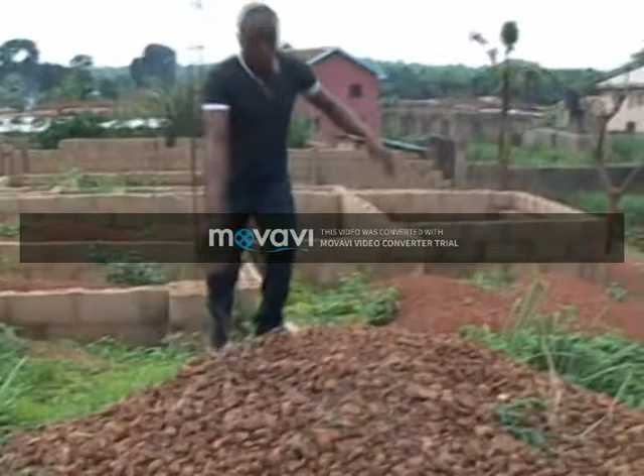To lay good foundation, earlier the better. In the nearest future, you will be one of the leaders. So we pray, amen. Oh my daughter, you should be ready to lay good foundation. Earlier the better. In the nearest future, you will be one of the leaders. So we pray, amen.

To become a leader is not very easy. To become a man is not daily work. Everybody's ambition is to become a leader, is to become a big man. That is the struggle. Oh my daughter, you should be ready to lay good foundation. Earlier the better. In the nearest future, you will be one of the leaders. So we pray, amen.

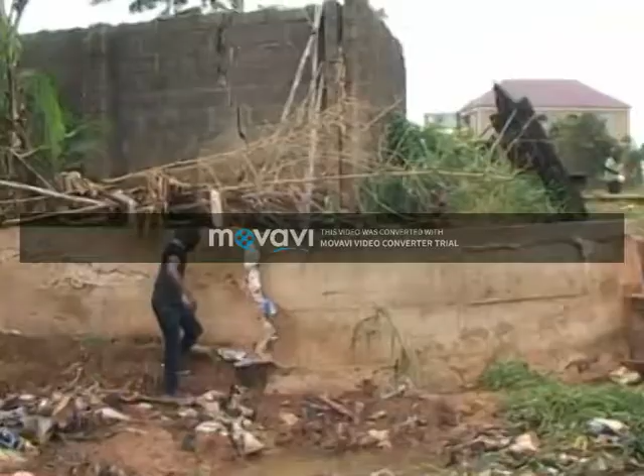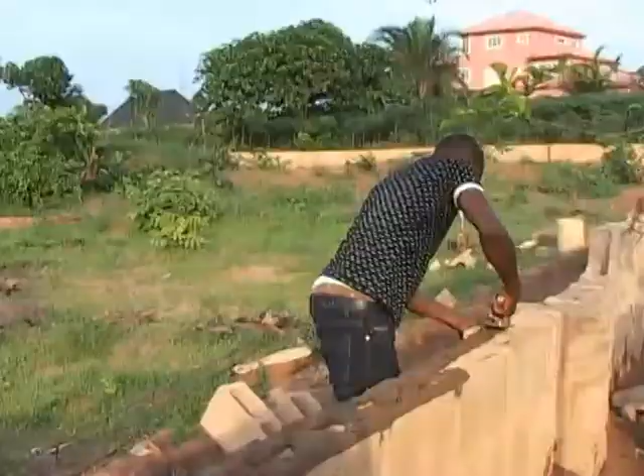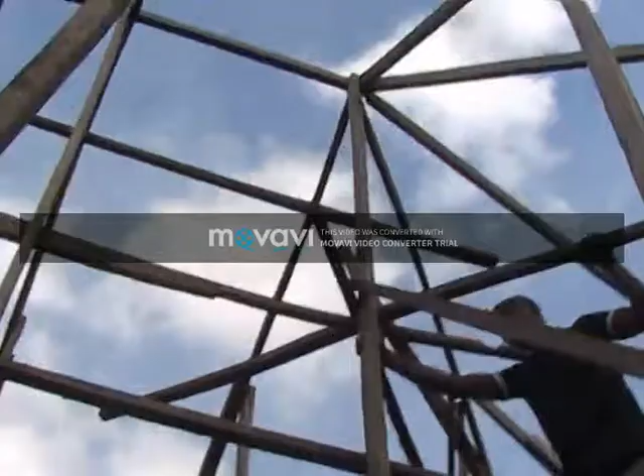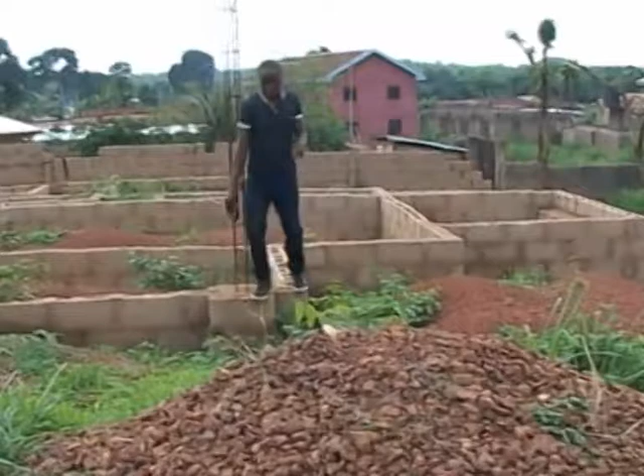You should be ready to lay good foundation. Earlier the better. In the nearest future, you will be one of the leaders. So we pray, amen. To become a leader is not very easy. To become a man is not daily work. Everybody's ambition is to become a leader, is to become a big man. That is the struggle. So my daughter.

Today's lecture on building skill acquisition has the intention to transfer the knowledge and the skill of building a house to the present students and future generation of Nigeria. This building skill acquisition will enable the students and the young generation of Nigeria to have the skill that will equip them to meet up with the economic challenges in the country.

Because when one has acquired the knowledge of building skill acquisition, that person can be able to employ himself or herself, and fit into one industrial aspect of the nation, because it is obvious that most people do not have the opportunity to pass through the higher institution, and some of them use having no opportunity to pass through higher education in the country as an excuse for their unemployment.

But after today's lecture, they will know about building skill acquisition, and anyone who watched this lecture will know how to construct a house. So today, I will tell you people how to start the processes in building construction. I will first and foremost introduce myself. I am Oluka Ifeanyi, a graduate of Enugu State University of Science and Technology,

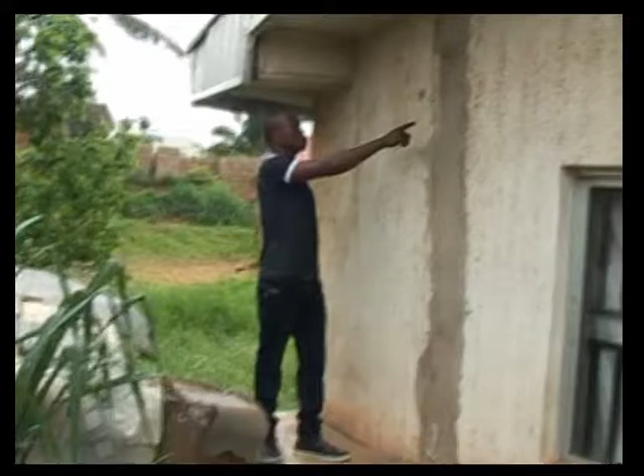Now, for those who are not qualified in building construction, those who do not pass through the necessary practice in building construction, I will show you an example of what they have done, which resulted in negative consequences. Now, look at this building to observe what I'm talking about. I told you that I will show you the consequences of improper foundation type in building construction. Look at this wall. You can see a crack. This crack in this building is a result of inadequate foundation use.

The builder that constructed this building did not know that he's supposed to make use of a raft foundation in this type of sticky clay soil, which is associated with the swampy area in this place. And as a result of this, the occupants of this building have run away for their dear life. And there are so many other inconveniences that may come if the engineer does not know what he's doing. So take a note. So listen again.

This type of soil is not very proper for building construction because of the earth movement, the land movement. The land is expected to vibrate at least once every year. And when a builder has constructed a house in this type of area, after the rainy season, if the builder did not make use of the normal foundation type that will suit this soil, during the movement of the soil, the building will start cracking, just as the example I have shown you in this building.

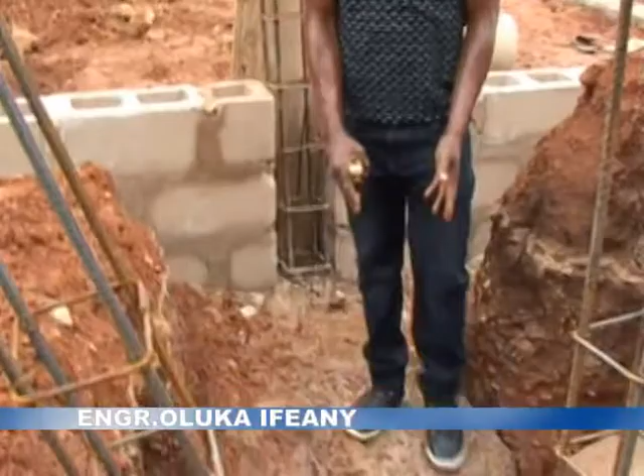But we have to start with raft foundation. Raft foundation. If you listen properly, you will know about the raft foundation. In this lecture, we discuss raft foundation. And here, looking at the foundation trench, you see this place has been blinded. After this blinding, next comes the raft foundation, because the raft foundation is a type of foundation that consists of a reinforced concrete raft under the whole building on compressible ground, such as a very sticky clay soil. Now look at the application of the raft foundation.

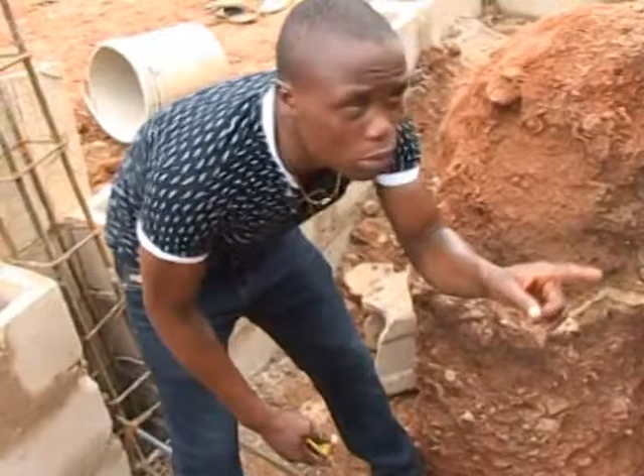After the blinding of the foundation trench, next comes the bar. This is a bar. After placing this bar, you will cover it with concrete. You make sure that the bar is in alignment with the block. You use the block line to achieve the standard placement of this raft wall. This is a very good example of a raft wall.

In building construction, as I have shown you, the sticky clay soil is associated with the swamp area. In that swamp area, make sure you make use of this type of raft foundation. This is a very good example of a raft foundation. Some people call it ground beam.

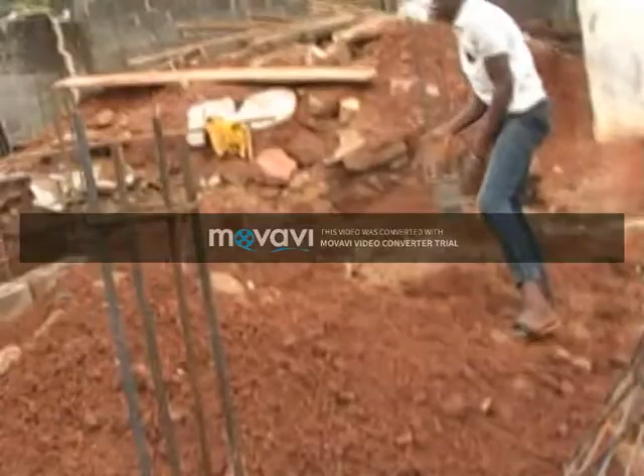In our lecture on the raft foundation, I told you after the ground beam, after the blinding, you brace the beam, which I have shown you on that blinding, in accordance with the block line. After the block line, you place your beam and cover it with a foundation footing. That's all about raft foundation.

Okay. Furthermore, there are two types of foundation. There is one called a wide bed raft foundation. That bed raft foundation is done by bringing this bar,

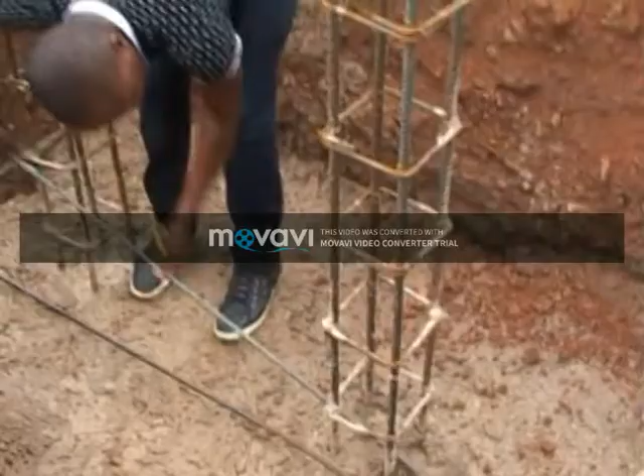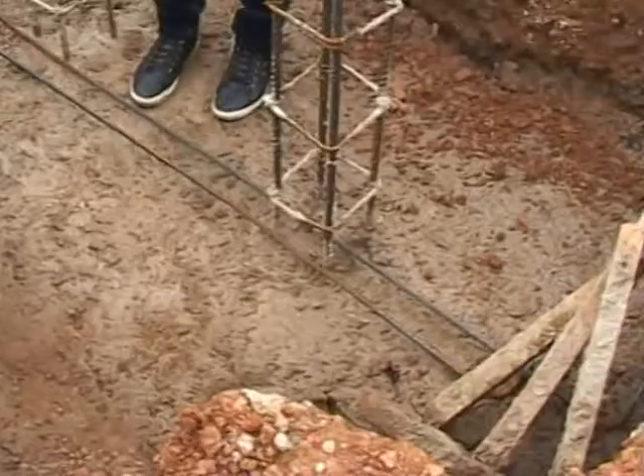Placing them at the required aspects of the building, of the foundation. This is a typical example of a wide bed raft. This is now expected to be covered with a proper, well mixed foundation footing in order to achieve a suitable wide bed raft. The other one I showed to you previously is known as white raft.

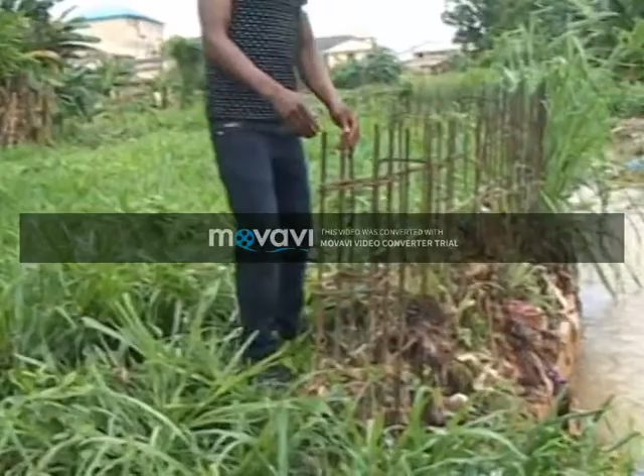The spacing of bars is determined by the expected thickness. If you expect a thickness of 225, then you will space it here and get it from this dimension. You can see. But if you expect a thickness of 150 mm, it can be determined through the use of this bar. So this is how we can achieve a pile foundation or a raft foundation suitable for the type of shrinkable clay soil like this, behind this river.

Everyone can observe how this is being structured, because in the continuation of this program, I will show you the completed aspect. By the time I show you the completed aspects of this type of foundation, you will know how it has been created, because this is the beginning of such a foundation, after excavating it to a very high depth, and you will see how this is being processed.

You can see, I told you about this type of foundation, and I told you the beginning of this type of foundation. People can call this a retaining wall. You can call it a raft wall. But the intention of showing you this is that during our continuous practical assessment, you will know how this is being created and the purpose of its creation.

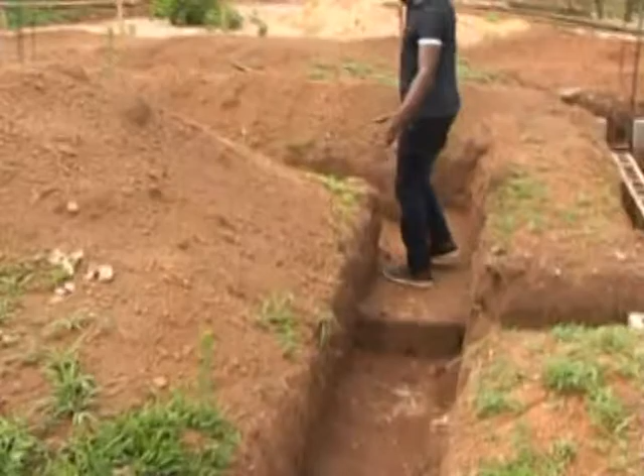I told us that we will be discussing different types of foundation. Now, we talk about strip foundation, because a strip foundation is a type of foundation that bears concrete under the load bearing wall. As you can see, this is a typical example of a strip foundation. I told you that it bears concrete under the load bearing wall. This is the concrete, which is called foundation footing.

In a strip foundation, during the excavation of this trench, you will see there is a step up here. The reason for this type of step up is because the ground is no longer level. Take a view and observe the nature of the sloping of this land. You will understand that this level is no longer uniform. That is why they apply this step up of 225.

And how to determine this step up of 225? During your excavation, when you note the difference in level, that is when you will get a 225 height block. You bring a block.

During the excavation, when you note a change in ground level, that is how you determine the stepping up of a foundation trench or foundation excavation. In a strip foundation, when you note this variation in level, you just bring this type of block and place it during the excavation. This application will enable you to achieve a standard level of the building.

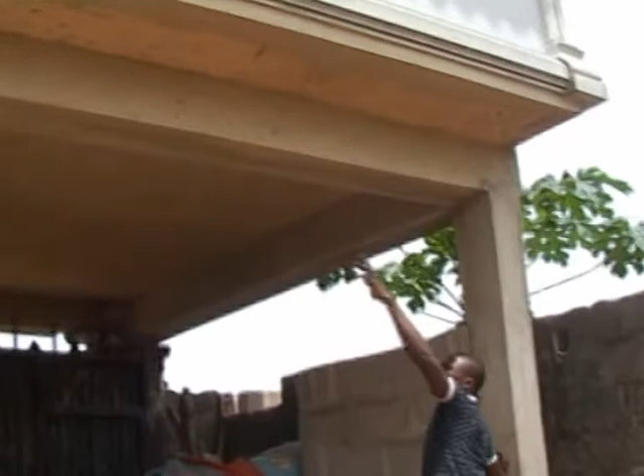So I told you that pad foundation is a type of foundation in which you insert a column, and on top it will be a beam. This is the beam to support whatever construction you want to do, and it is highly economical in structural arrangement. Using the pad foundation, you can achieve a standard level where there is a high slope area or where there is a flowing river. That is the advantage of pad foundation.

You can see the structure bears a residential area at the upper side of it as an upper floor, but here it's totally empty. That is to say, this is a pad foundation. You can use it to achieve your aim in a place where there is a high hill or a mountain to achieve a standard level.

In the sense that when you have inserted this pillar, this column base, and maybe the other side is a high slope area, you can have the other side excavated and achieve your intention. So that's all about pad foundation. In the continuation of this seminar or lecture, you will learn more about pad foundation and their uses.

Thanks for listening. This is another example of pad foundation. I told you that pad foundation is a foundation that bears a column base that is brought up, and bears a beam at the upper level in order to sustain the block wall that will be laid on it at the upper level. That is why it's constructed this way.

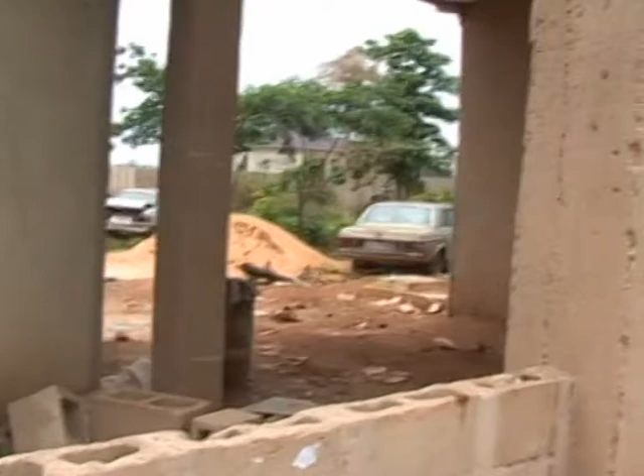Okay, now we want to discuss setting out of a building. In setting out of a building, there are certain things that accompany it. But we shall first and foremost let everyone know that in building construction, before one can become a builder, that person must know how to read tape. So for that reason, I will explain how to count tape.

If you look at the tape, you start counting the tape by 25 mm. If you want to convert 25 mm to inches, it will be 1 inch. The conversion of 50 mm into inches is 2 inches, while 75 mm converts to 3 inches, and 100 mm is regarded as 4 inches.

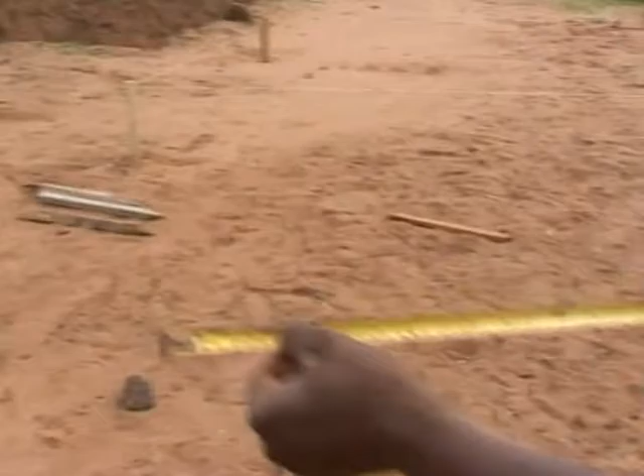But let me make it clear to each and every one of us how to count the tape. When we talk about 50 mm, look at the 50 mm here. We talk about 75, look at the 75. But this is 100 mm, which is regarded as 4 inches. When reading what is written here, you will know that this is counting in millimeters, because in most drawings a builder makes use of millimeters and meters. So here is millimeter.

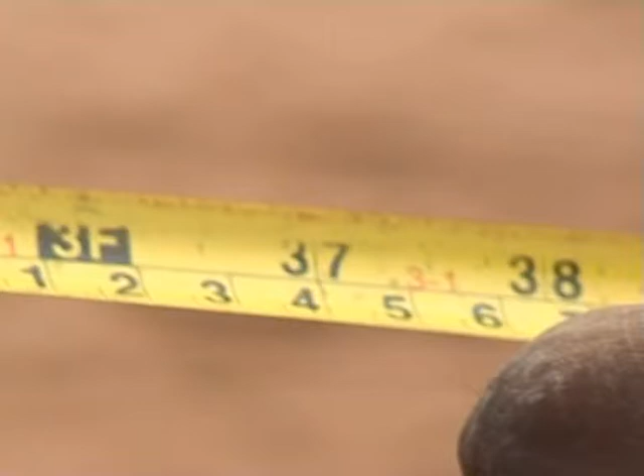Look, 300 millimeters is 1 foot, while 1000 mm is about 3 feet 3. So that's how you continue to count. When you talk about 1200, which may be called 1.2 meters, look at it here, 1.2 meters. So what I'm trying to do is that each and every person who wishes to be a builder must first and foremost learn how to make use of tape.

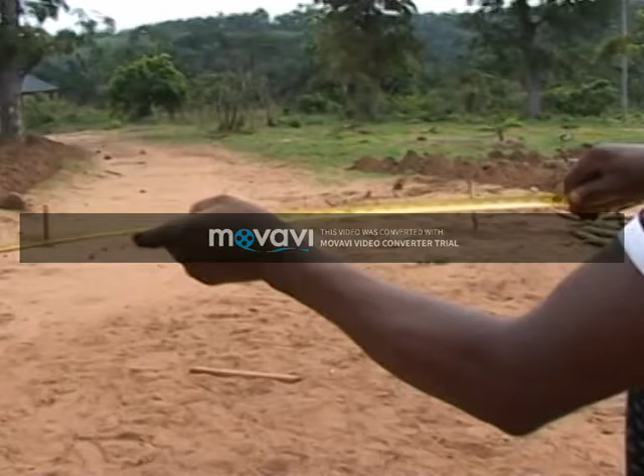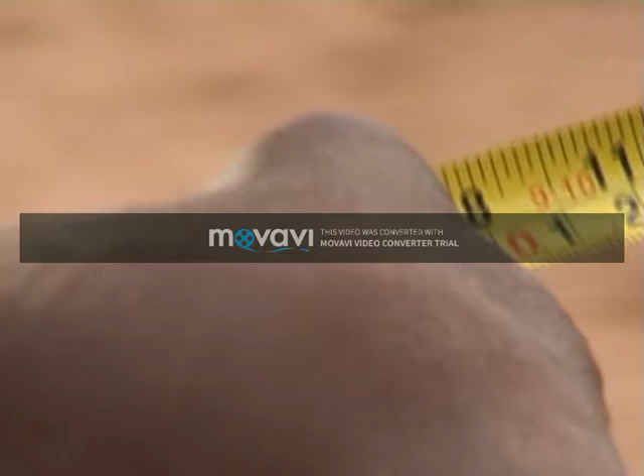That is my intention. But when you hear about 3000 mm, it should come to your mind that we are talking about 3 meters, which is about 9 feet. 9 feet, 1, 2, 3, 4. Look at how to count the inches. 9 feet here. 1, 2, 3, 4, 5, 6, 7, 8, 9, 10. That means 3,000, which is 3 meters, is about 9 feet 10.

So that is how you continue to do it until you come to the standard measurement of a room, which is 3,600. That's all about counting of tape, because from now henceforth, we will be migrating to setting out. In setting out of a building, there is what is known as a site plan. Everyone who wishes to be a builder will first and foremost learn how to count tape, because there's nothing you can do in building construction in isolation of tape. It is a vital tool in building construction.

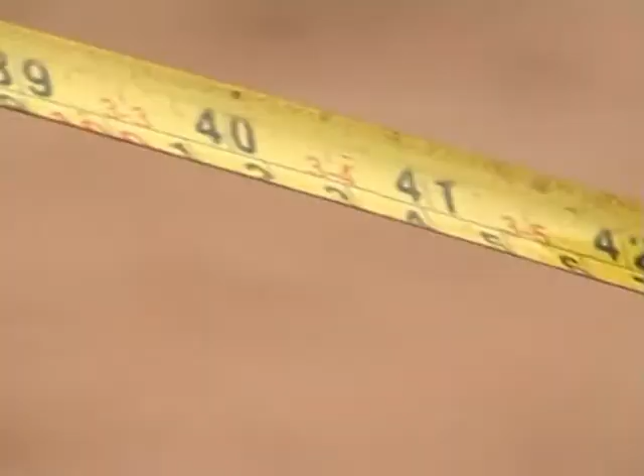And when you're looking at architectural drawings, you will know that they are making use of millimeters and meters; they may say 1 meter or 1,000. If you have such terminology, you should quickly rush to this side, and you will know that 1,000 is this. Looking at the upper side, we are counting in inches. You can count in inches, in millimeters, or in feet and inches. But builders make use of millimeters and meters in Nigeria and most parts of the nation. So please, to be a good builder, you should first and foremost learn how to count tape.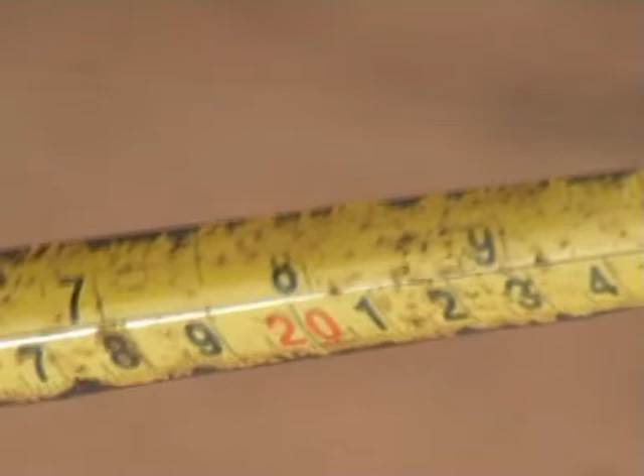Because the tape starts from 1 inch, which is 25 mm. You move to 2 inches, which is 50 mm. It moves to 3 inches, which is 75 mm. You migrate to 4 inches, which is 100 mm. It moves to 8 inches, which is 200 mm, and moves to 1 foot, which is 300 mm. So it shall continue until it gets to the standard measurement of some rooms, which is 3,600, which may be called 3.6 meters.

And the measurement of a window in building construction most times is 1,200, which may be regarded as 4 feet. So please, it is very, very important that every student who wishes to be a builder will first and foremost learn the counting of tape, so that it can help you to become what you want to be in building construction.

In building construction, you come across the site plan, which is the survey plan. It will tell you the access road, the proper position of the building, and the spacing you will give from the fence and the access road to the plot. That is the importance of the site plan in building construction.

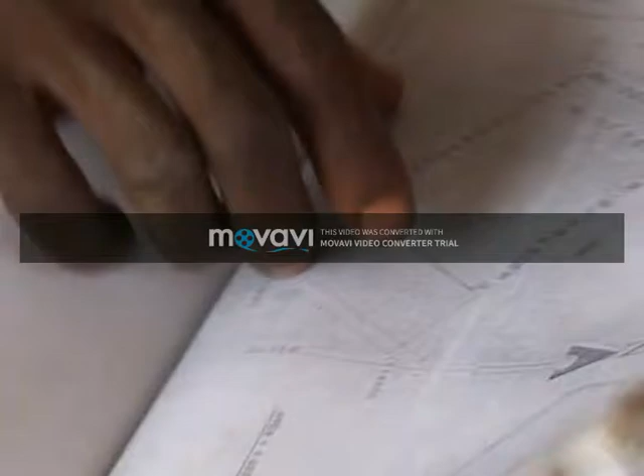Taking a look at the site plan now, you will observe the access road which I'm talking about. Here is the access road in the site plan.

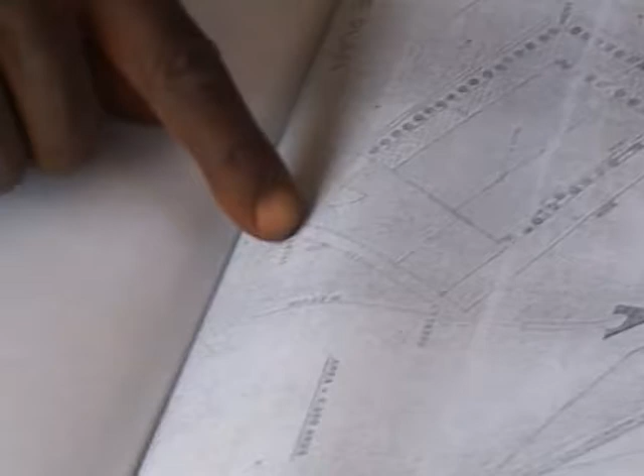Here is the beacon of the owner of the land, and here again is the beacon. Looking at these lines, it is telling you that from here to here is a beacon, and from here to here is a beacon.

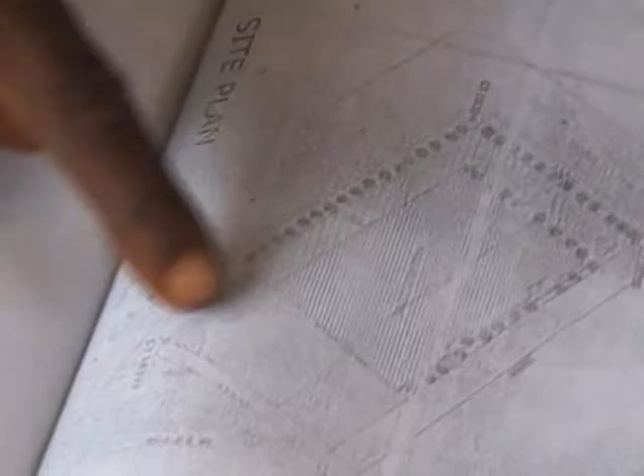Looking at this, you will know that this is an entrance into the building. This sign here is telling you that this is the gate leading into the compound.

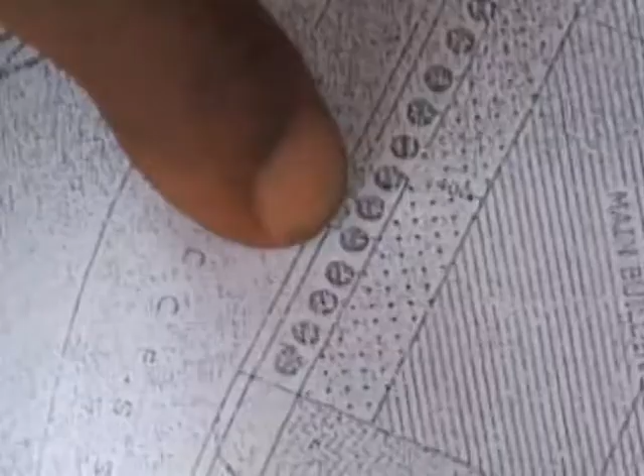When you come into the compound, look at the main building. From the fence we get 2,400, two points away from the fence before we can get our main building. And from this part towards the gate side, we get 7,900 from the gate away. And here again, from this back side, we get 2,400, making it square.

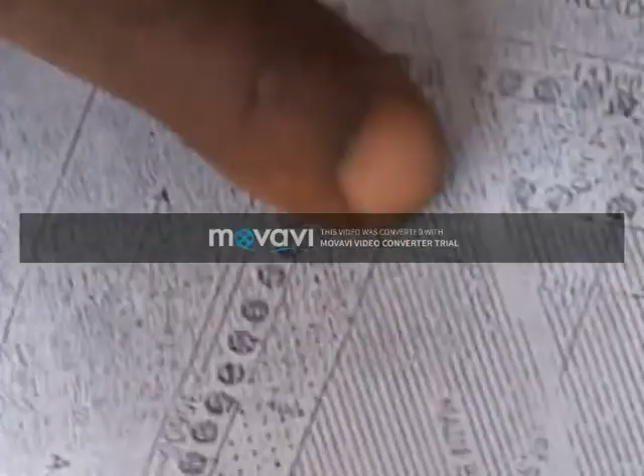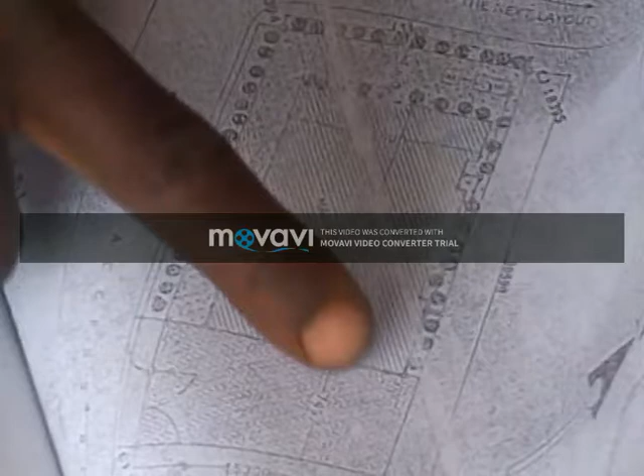Now, here is our main building. Every construction or setting out you will do will not exceed this dimension, which is the main building. That means from here to here is 19,000, which is the size of the building, which may be called 19 meters. And from here to here is 19,600 mm, which may be called 19.6 meters.

So that's all about the site plan.

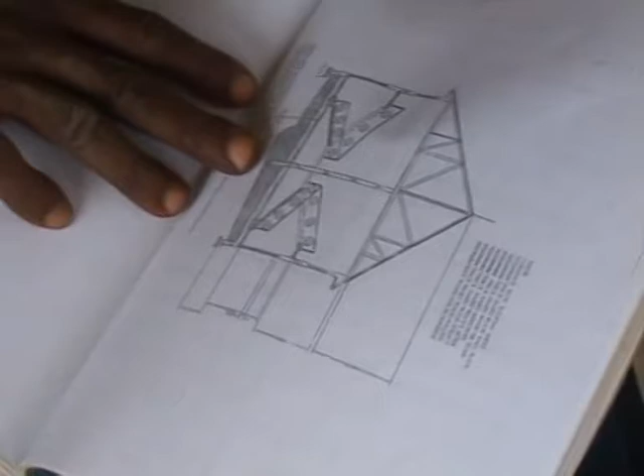Going to the section of the building. The section in a building construction will tell you where everything, most things about the building which you want to construct or the proposed building, have been detailed. That is where you get the roof materials, the wood, the hardwood that may be necessary for the construction of the building. That is all about the section.

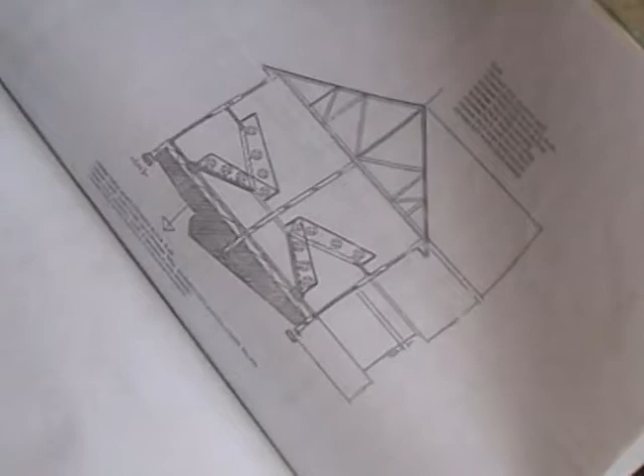And the section will tell you the thickness of the oversight mass concrete that is required, and tell you how to place the hard core, as well as how to do your sand screeding floor finishing and the thick mass concrete foundation footing, and the size and height of the building. But there's no need of wasting time in this section, because when we talk about the roof aspect, we will talk about the wood and their requirements in the building construction.

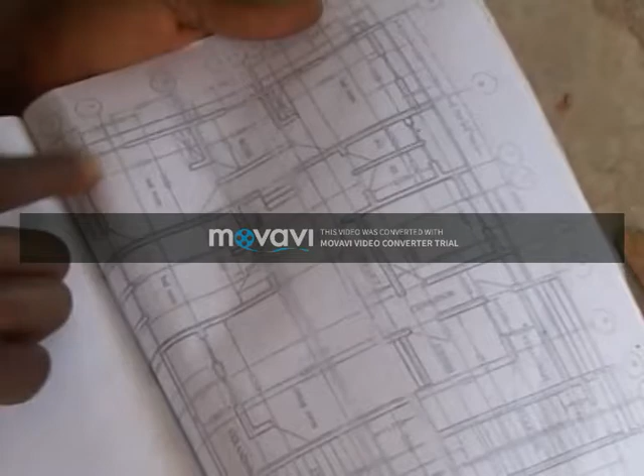Without wasting time, here is a floor plan of a building. Every builder, or anybody who wishes to be a builder, I told you earlier that we are embarking on the setting out processes right now. And for you to achieve a standard setting out, looking at this floor plan, we are telling you that we get the overall dimension of this building before you set out your building.

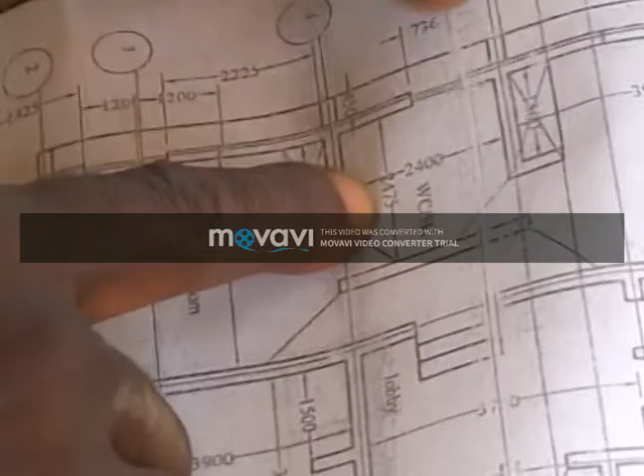Now, looking at this veranda, it is dimensioned at 1,500, and this room, including the wardrobe, is dimensioned at 3,900. This one, this master bedroom toilet, is dimensioned in this area at 2,400, and this room is dimensioned at 3,900.

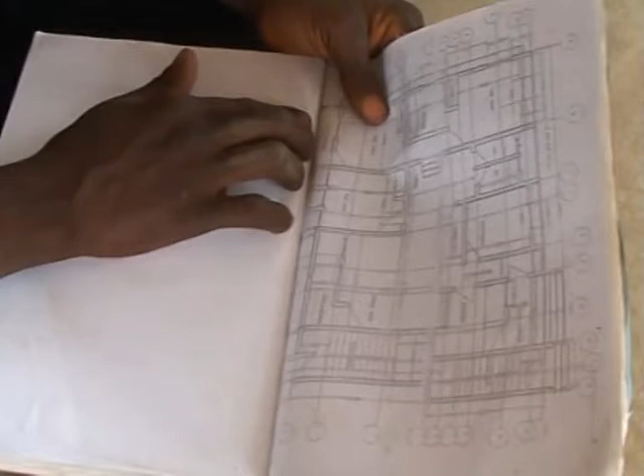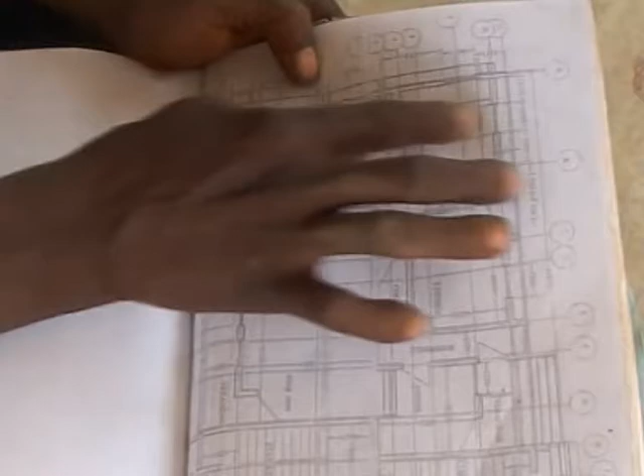After you have gotten this dimension, you now calculate, because there are different types of block thickness, but here we are making use of 225 block. We have to add this 225, which is this wall, add this 225, add this 225, add this 225, and add this 225, and add it together to the overall dimension which we had arrived at from the calculation of the room and the toilet, and use it as the overall dimension of this side.

Now, look at these lines. You can see this is number 10. This number 10 here is telling you there is a wall here, which is known as a grid line. This is called the grid line.

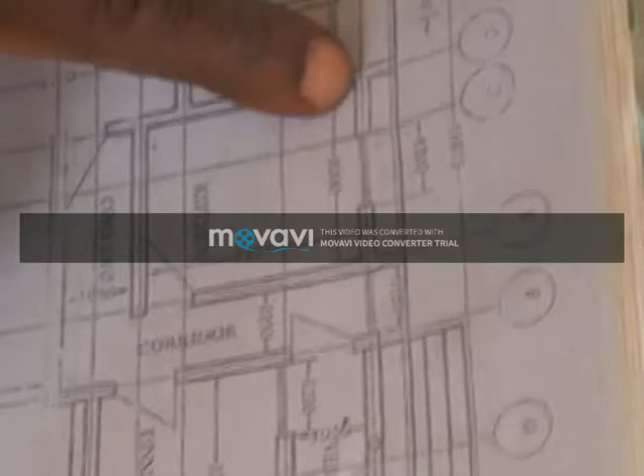When you take a look at this, you will observe there is a wall here. This is telling you that in your setting out, on your profile, you will indicate all these numbers and make sure they are not omitted. Never omit them. Looking at the grid line here again, number 10, you can see the wall of number 10. This grid line is telling you how this thing is going, and you find out there is another wall here under that grid line of 10.

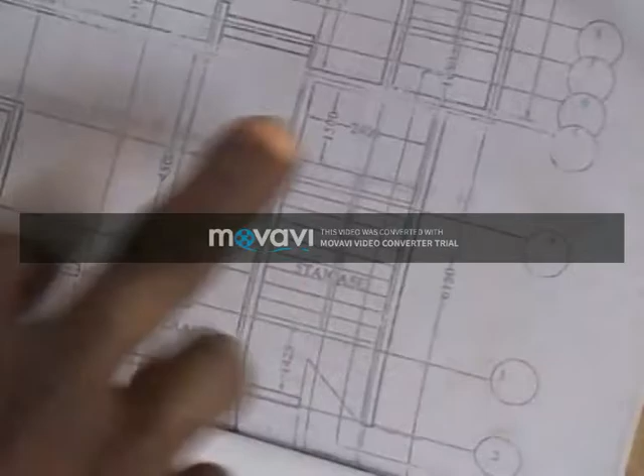So please, after calculation of this side, you come to this side. Looking at this staircase and this staircase, you will observe that there is a recession here, which means this place is bigger than this place. Since this place is bigger, you have to start your calculation from this side.

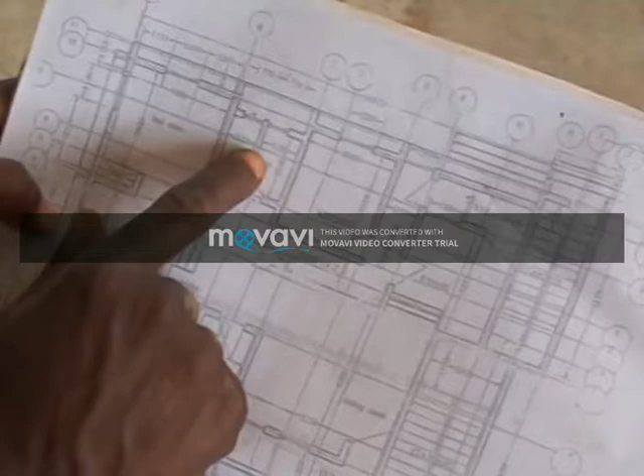Whatever overall dimension you realize from here will be sufficient for this building construction in a proper setting out. Now you have to add 3,600 plus 1,050 mm and 1,350 and 3,000 mm, which is 3 meters, plus 1,050 mm, and this 3,525 mm and 1,800 mm.

After adding all these things together, you will now add the block line again. You can create this block line: 225 plus 225 plus 225 plus 225 plus 225 plus 225 and 225.

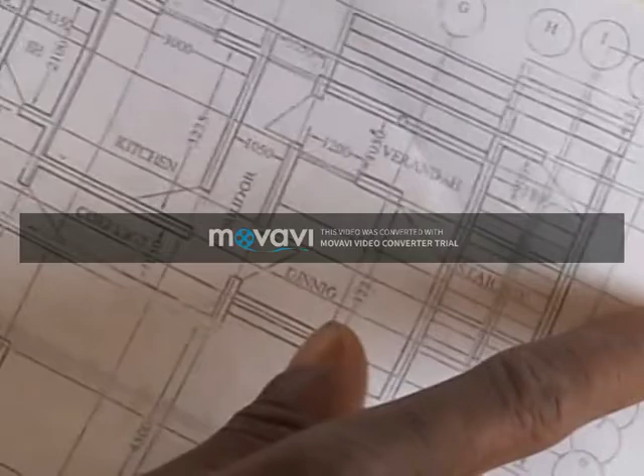You add them together to the overall dimension which you have realized, to give you the appropriate overall dimension for this building, in order to realize the main building which I have shown you in the site plan, which will guide you during your setting out to obtain a proper squared house.

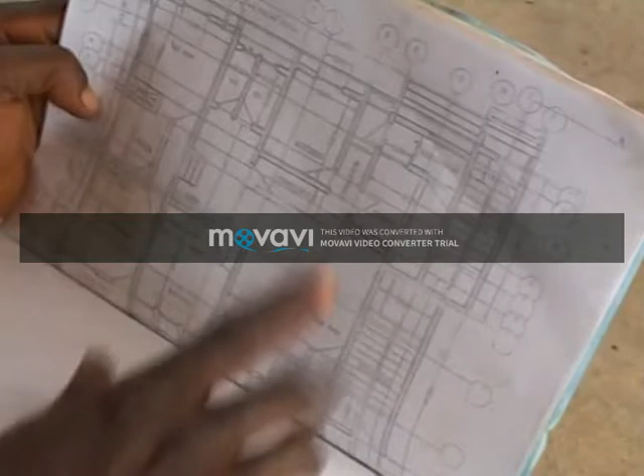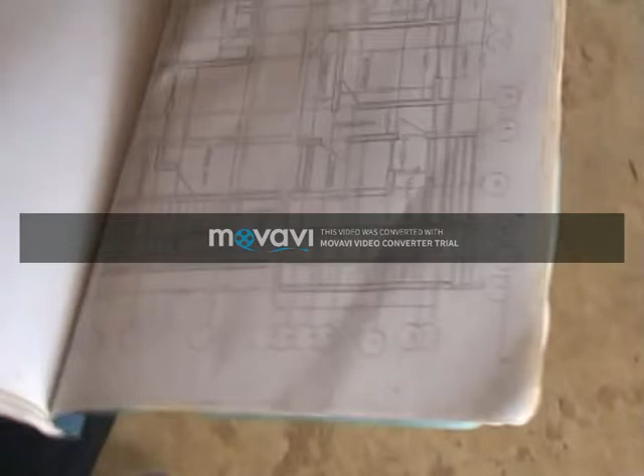After this, in building construction, the next stage is the setting out, because we have now achieved the calculation of the main building dimension. Getting the overall dimension here, which is 16,875, and getting the overall dimension here, add all of them. Use your square, your tape, and every other thing to make sure you achieve a stable squared building.

Now I'm going to the field to display all I have told you about setting out. By the time you'll be looking and observing everything properly, you will know how to do a setting out in building construction. Now, we are going out for the setting out.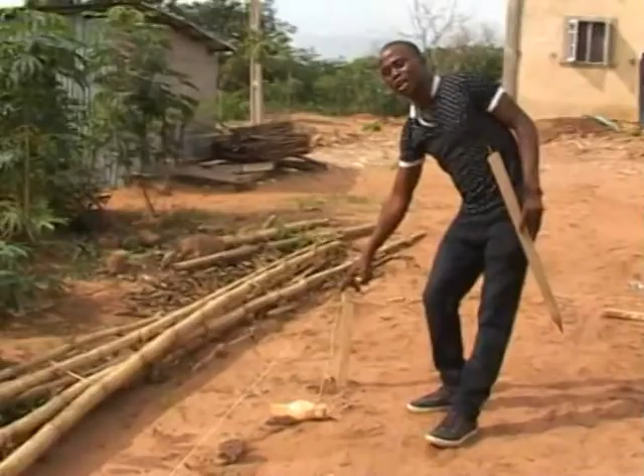I told you that in a site plan, you will have a fence. So this rope now is regarded as our fence. Looking at this square rope, you will know that it is our fence.

But in order to achieve the main building, you will get the dimension. Let's for instance get 1,200 mm from here, from the fence. And this way you get 1,200 mm for the fence.

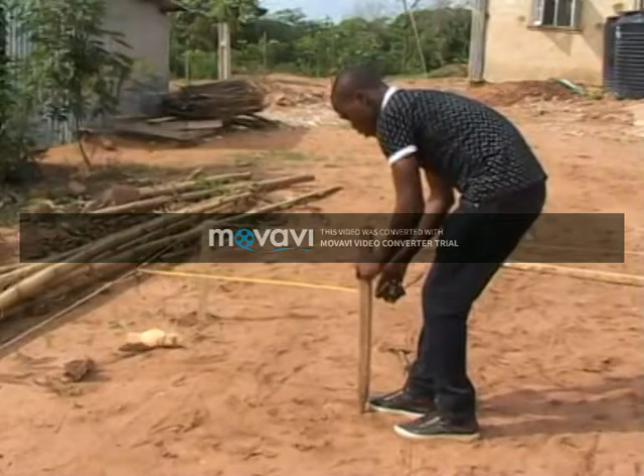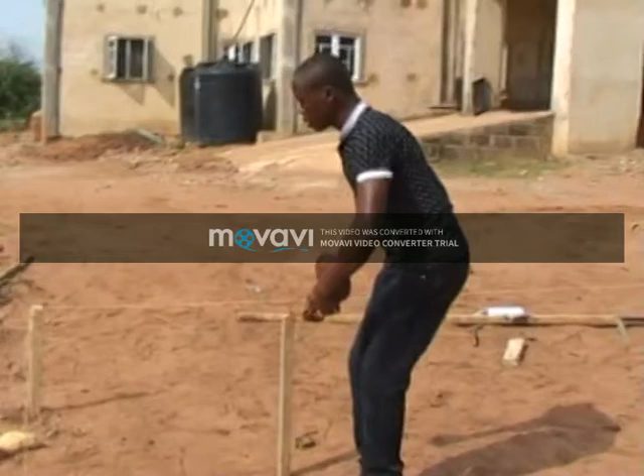From the fence, this is our block peg in building construction. When you are doing your setting out, this will serve as your block peg. To get the overall dimension for squaring, you put your measuring tape in this block peg and load down the tape to get your overall dimension.

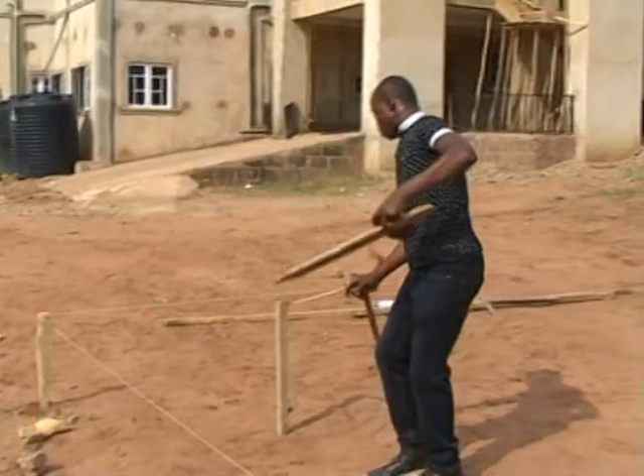My dimension is 16,000 mm, which is regarded as 16 meters. You load down your tape towards this side to get the overall dimension which you are looking for. Here may be regarded as this 16,000 mm. Then if you make sure it is here in a straight line, the next thing is to get the same measurement you got from this side in order not to make mistake in your squaring.

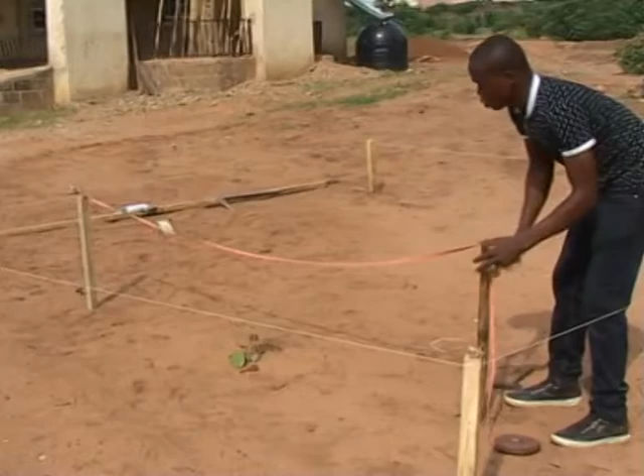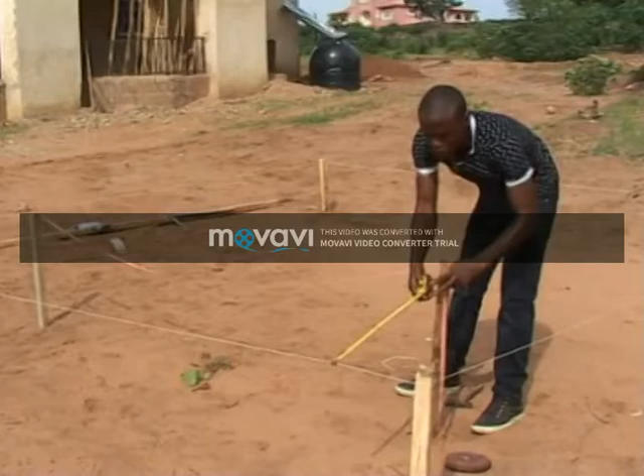You get the 1,200 from here, to make sure it is in a straight line for squaring, and you will straighten your tape. You make sure there is no mistake when doing it. Get your block nail for squaring and put it here for proper building squaring. Over.

In order to achieve a proper squaring of a building, this is how to achieve the square. Since we have tethered the rope, the other side, and this edge, it is required to be squared until it becomes properly square, in order to achieve a standard setting out of a building.

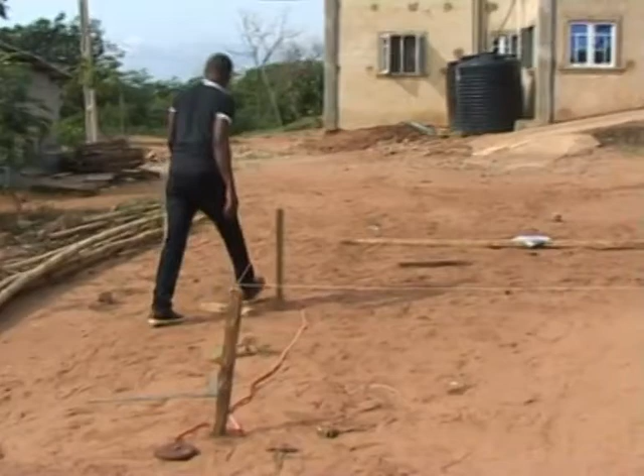Okay, so once we get it properly squared this way, yes, it's okay, it is now well squared. The next thing you will do is ask the person to hold on and get another peg to make sure it is properly squared. You test it again to know if it is still square. If it is still square, then you move on and go towards the end.

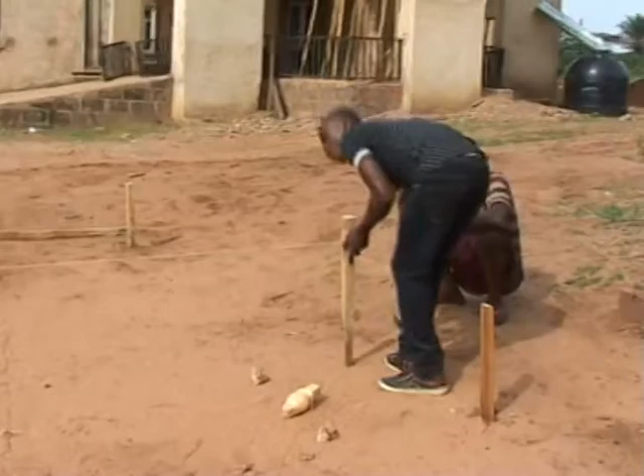When you are going there, don't forget to go with your tape in order to get the overall dimension of this side. Move on to get the same overall dimension. If here is the overall dimension, you're expected to tether your rope there. Over.

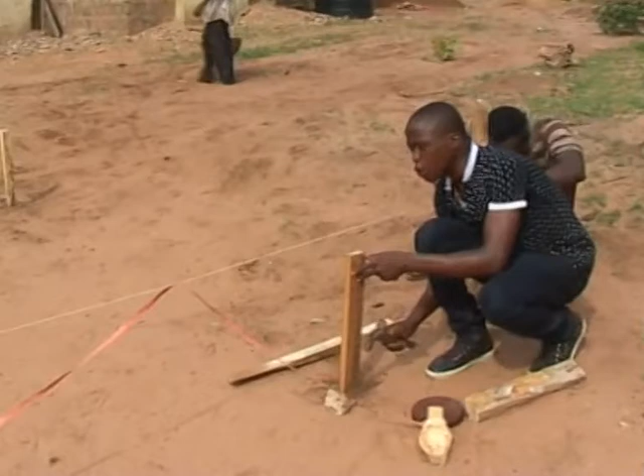If you note that your peg is bending, you just hit the ground for it to come to the proper position. Then the next thing is now you recheck your measurements to check if it is still correct.